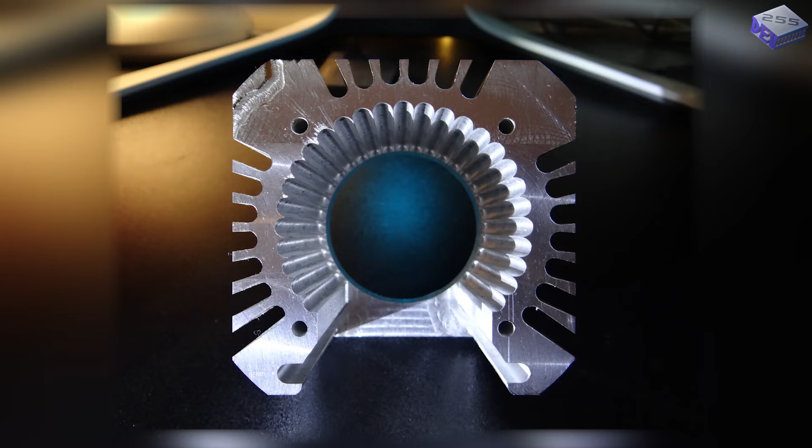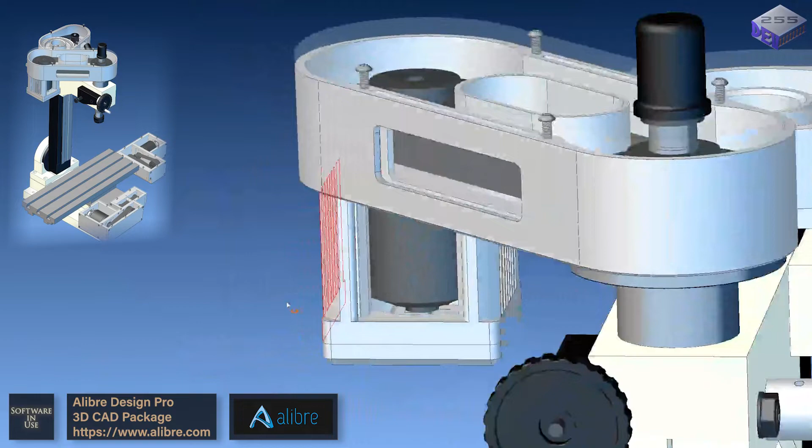This part will be fitted to my solar powered CNC mill that I'm converting and will act as a heatsink for an 1800 watt brushless DC motor. Designed in Alibre Design, this heatsink will form part of the spindle drive and mount to the spindle belt housing. It also has an acrylic window to see the brushless outrunner and provides a mount for a rotary encoder for accurate motor control too.

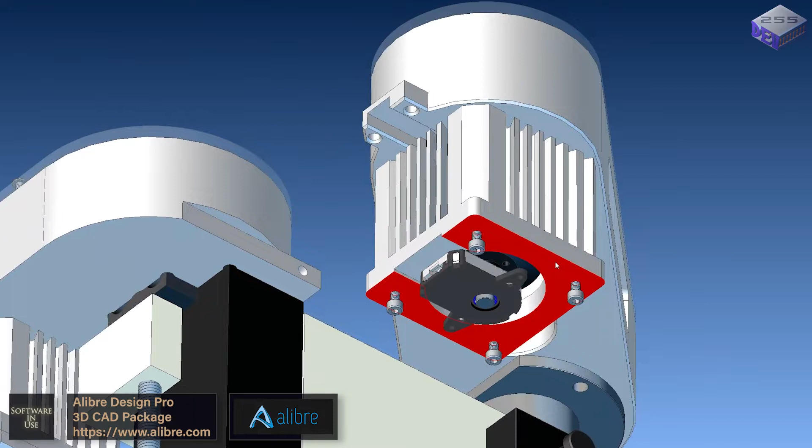This AMT 102 capacitive rotary encoder provides up to 8,192 counts per revolution and up to 7,500 RPM and should allow for precision control for machine tapping. I hope to run the new motor at around 6,000 RPM, so well within the scope of this rotary encoder.

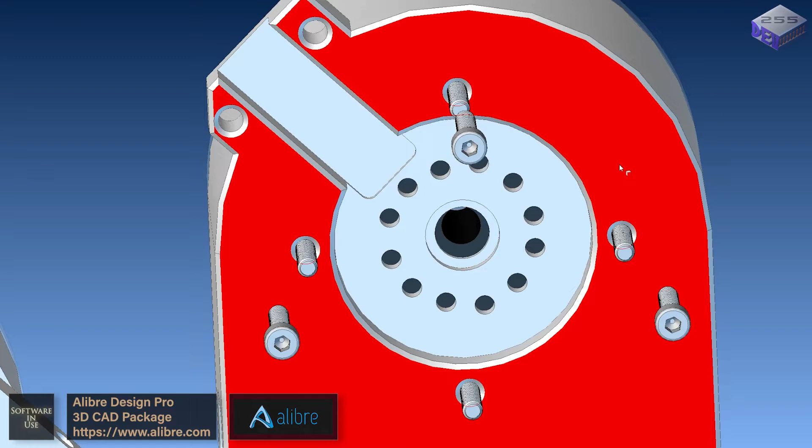The motor is not fixed at the base or heatsink, but attached to the spindle belt housing via 4 screws, which will require heatsink compound on both the motor and heatsink mounting points to use the spindle belt housing as an additional heatsink. The belt is a HTD tooth type that's lightly tensioned around 2 40 teeth timing pulleys. I chose this size as there are more teeth in contact with the pulleys and the belt will run slower with less load, so should last quite well.

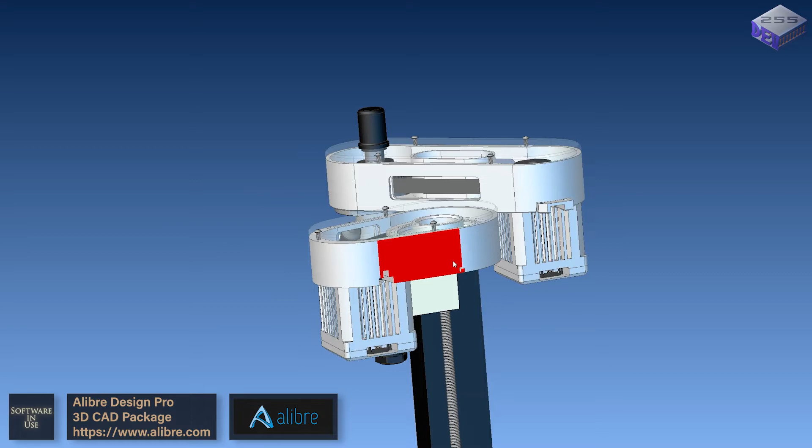There are 2 identical motor heatsinks to make, the other for the Z-axis, although this could be milled faster with the spindle speed upgrade, where the Z-axis has a belt reduction of 4:1, similar to the X and Y axes, although may need a heatsink due to lifting the weight of the spindle components.

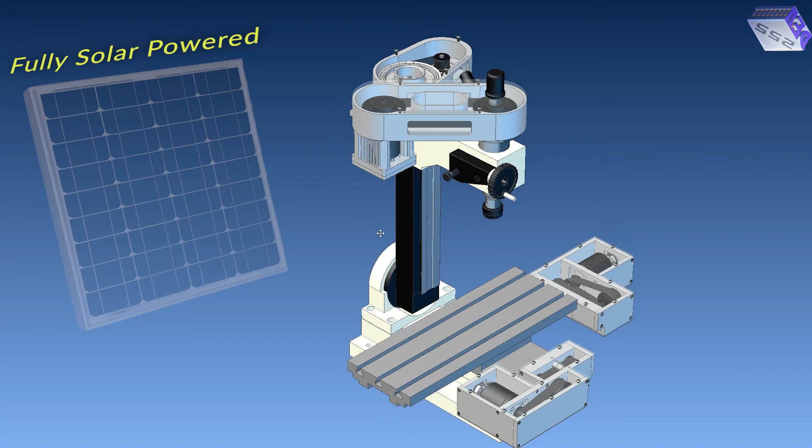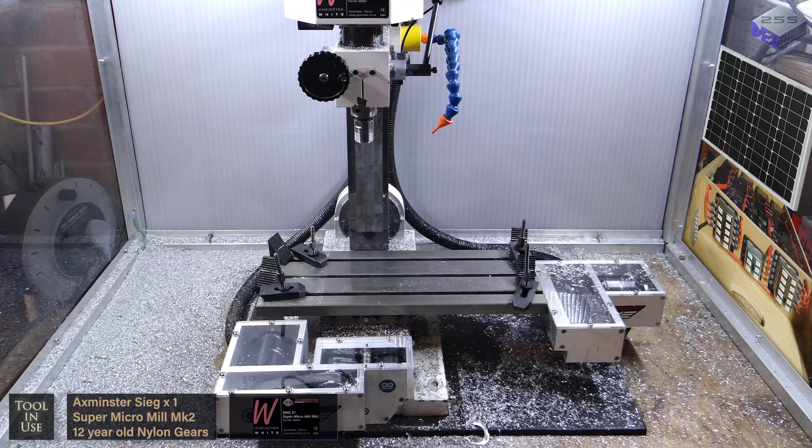As mentioned before, this mill runs purely on solar power, with a 50 watt solar panel and a set of 12 volt batteries that used to have around 75 ampere hour of capacity, although now with all the upgrades I'll need some heavier duty batteries and a larger solar panel, so I have 2 12 volt 240 ampere hour batteries ready and a 330 watt solar panel. I just need to wire it all up. The X and Y axes run on 12 volts, where the Z axis and spindle will run on 24 volts and will hopefully look something like this.

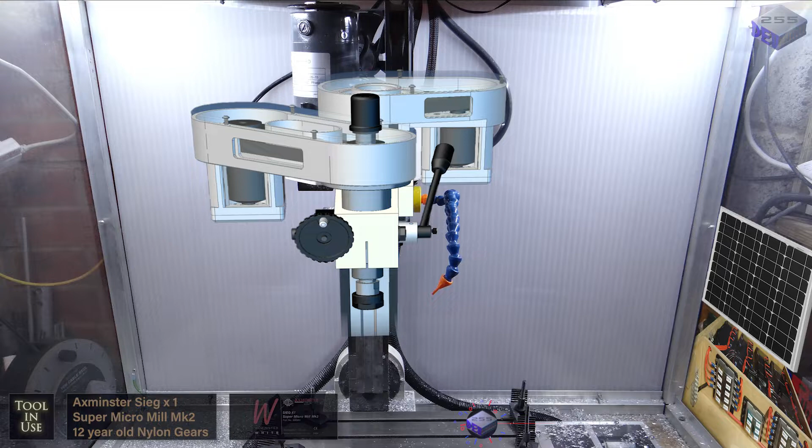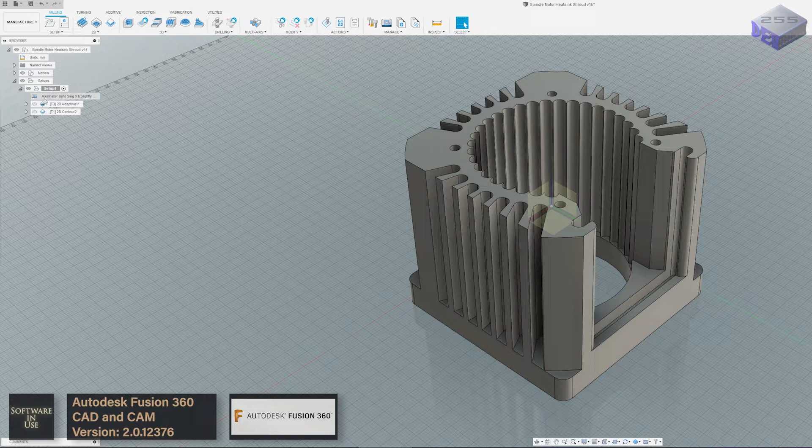So, I like to use Alibre Design for the CAD, computer aided design model, and Fusion 360 for the CAM element, being computer aided manufacturing. Essentially, creating the G-code for the mill to run. But first, the toolpaths need creating around the part, and Fusion 360 has some great tools for this, and it's easy to see the route the tool will take prior to cutting through stock.

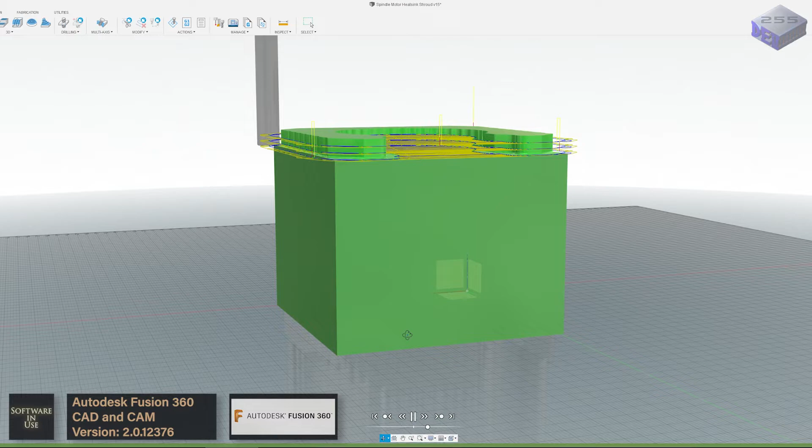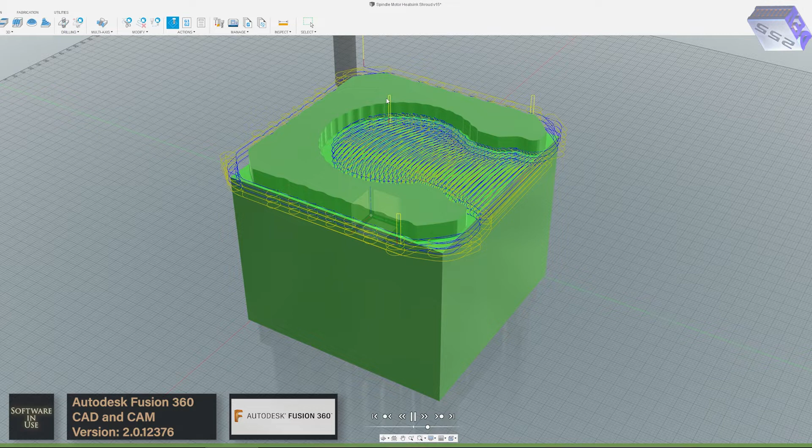The first cutter will be an 8mm end mill with a small corner radius that will remove the bulk of the material layer by layer. The only issue with my mill at the moment is the lack of CNC Z-axis, so I'll have to lift and lower the Z-axis manually for each layer. So these Z-axis movements will have to be removed manually in the G-code to keep the machine at the same height during each layer. Where there are height changes between each layer, I've programmed this into the mill to pause milling and tell me the required height so that I can manually move it, then continue the operation.

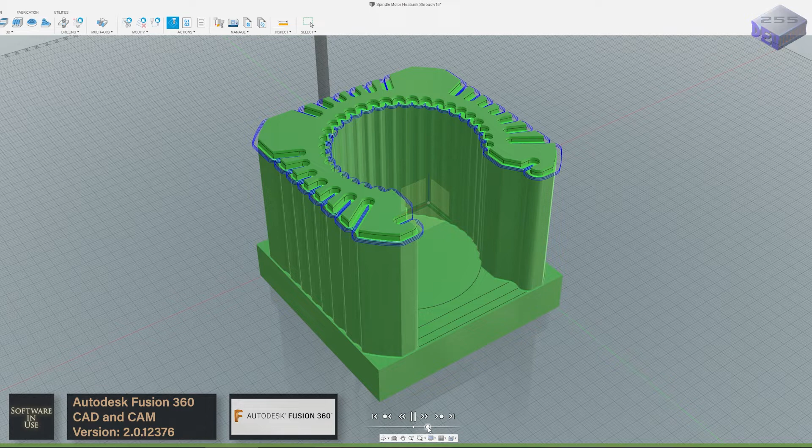And then once the bulk of the material has been removed, it's onto the 4mm long tool to cut out all the features. This will probably take some time as the cutter is long and more flexible, so I'll have to take shallower cuts at 2000 RPM, and that's the maximum speed for the current motor that's on there. It took a while to sort the toolpaths out, as I'm only just getting to grips with the Fusion 360 system, although there are plenty of tutorials online. I may even make one of my own.

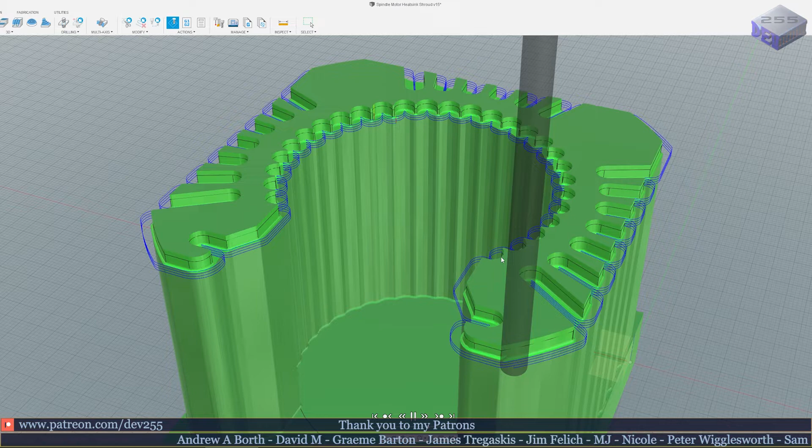So down in the depths of the toolpath, you can see the starting position and the layer drop down points that I'll have to manually move. To set up the toolpath to allow for manual Z-axis movement, I'll need to set it up to only have one layer and then restart the same G-code for each layer, rather than multiple layers. So this operation has created intermediate Z-axis movements that will need to be amended.

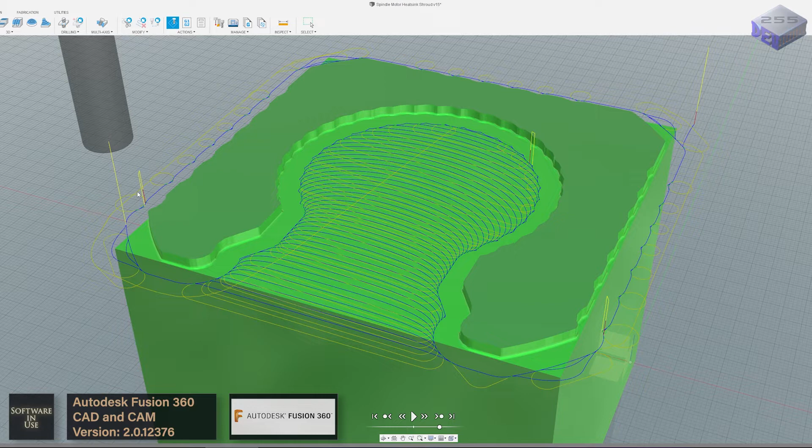So I just need to generate or post the G-code, then check the toolpaths at the points where it will raise and lower to see how it interacts with the part. Then adjust the G-code to keep the machine on the same level. That way the machine will do one layer at a time while I get on and do something else.

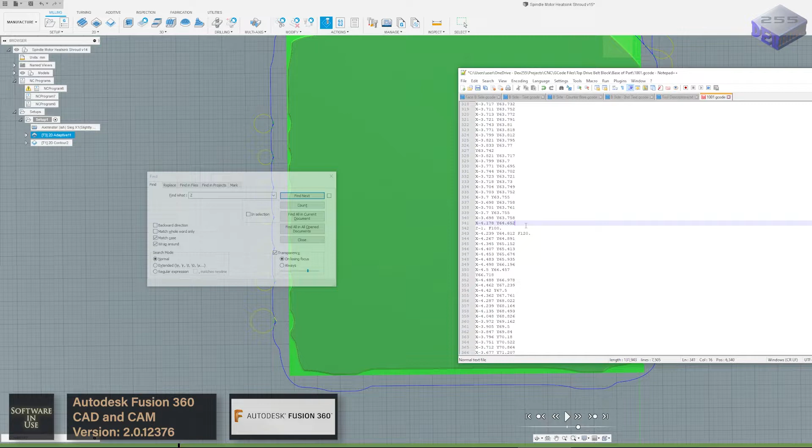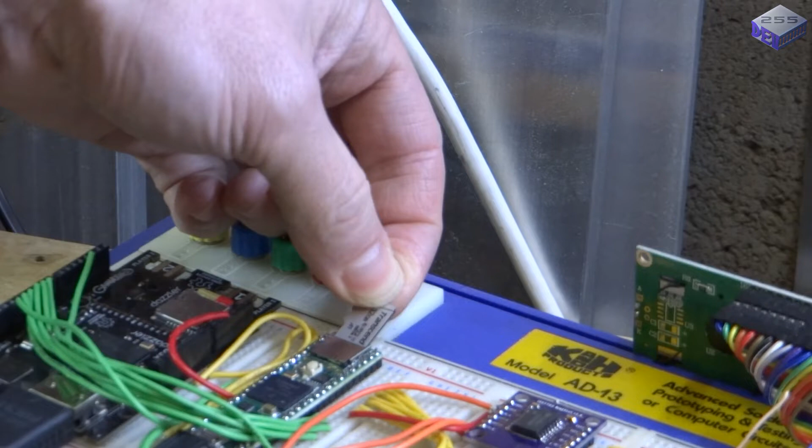Then it's a case of putting the G-code on a micro SD card and putting the file on the mill's microcontroller. In this case it's a Teensy 4.1 microprocessor running an Arduino sketch I wrote on the Arduino platform.

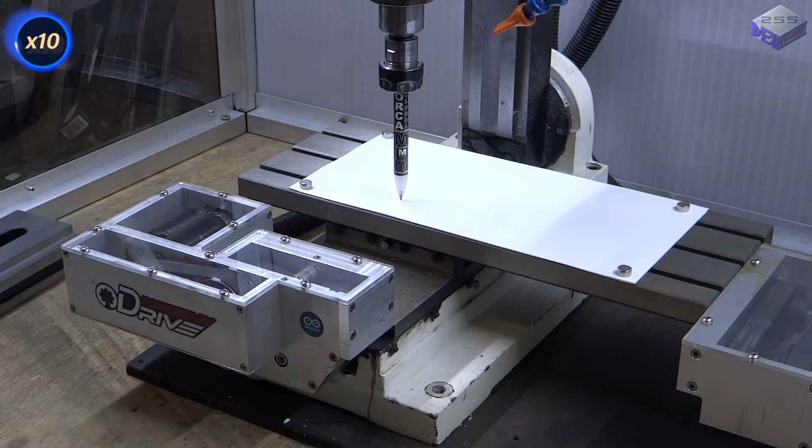I thought it best to do a test pattern first on paper just because I'm constantly developing the microprocessor code to make it easier and safer to control the machine. Plus I don't want to crash any milling bits. One of the features of the display is to show the movement of the table. To be fair, this was just me getting fancy with the Gameduino.

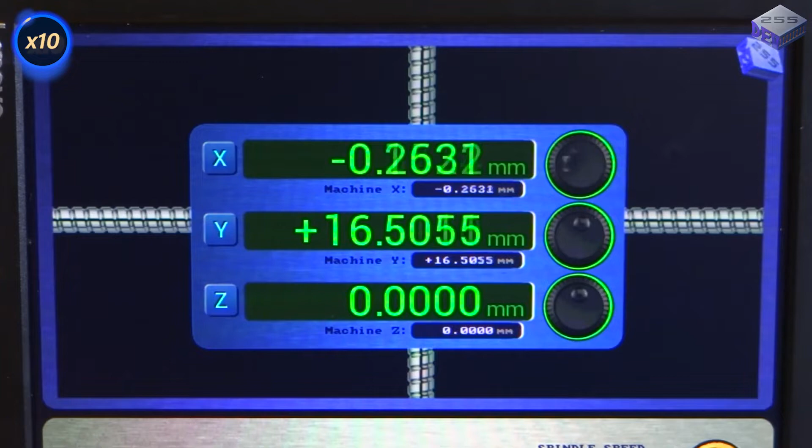This sounds a bit like Indy 500 from the Atari 2600, if you're as old as me and remember that.

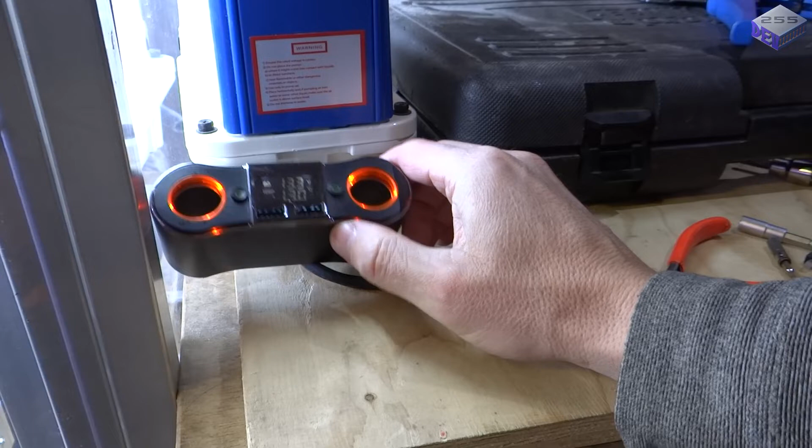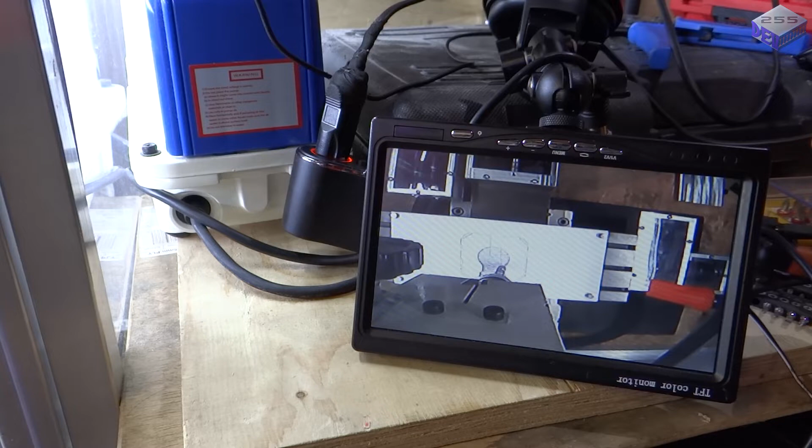Another handy device, rather than me standing around in a cold garage, is this mag mount reversing camera that I use on the MGF trailer, a 2.4 GHz transmitter and a 12V monitor. This allows me to watch the progress of the mill and just pop out to lower the Z-axis during each layer.

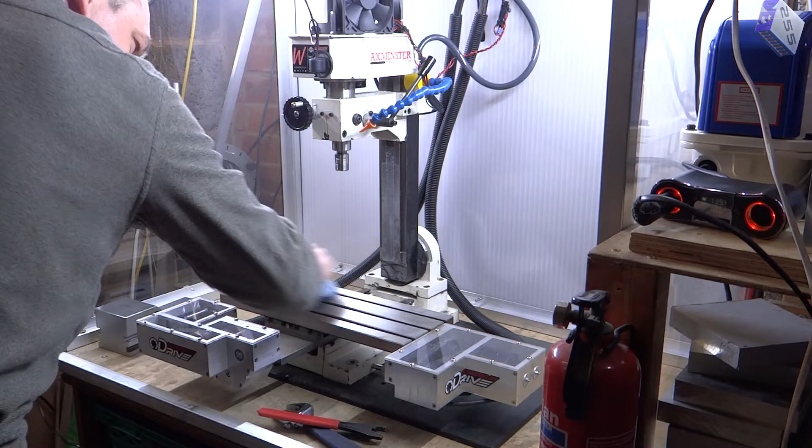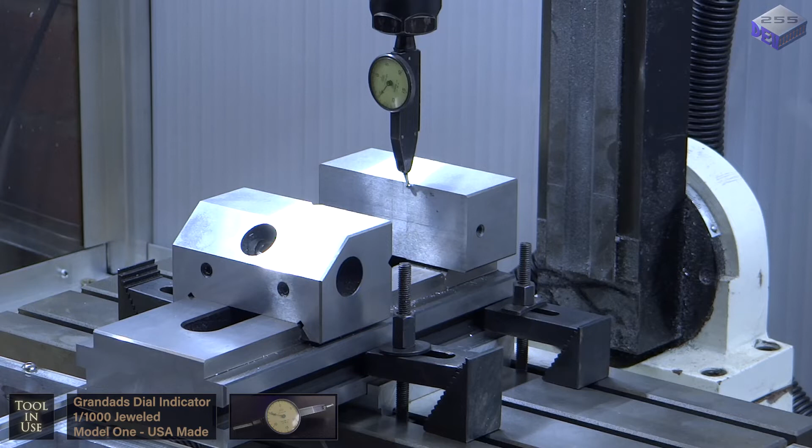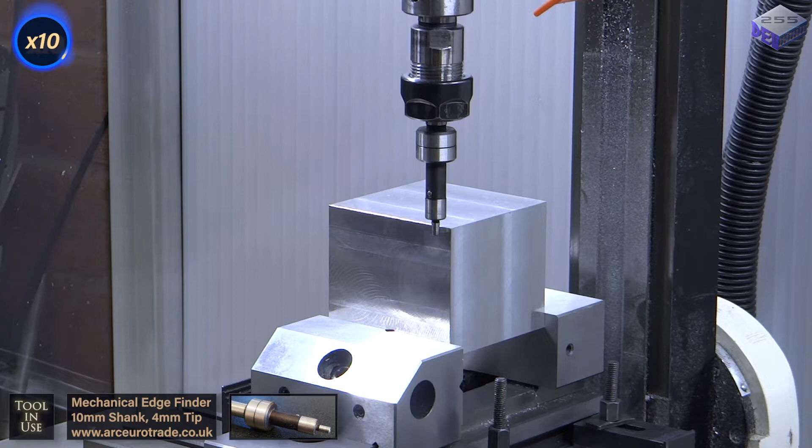Right, now to mill the part. First of all, after mounting the vise, I'll need to check that it's square to the machine. Then set the front left of the stock as the datum point using this edge finder. So it just needs the kick on the Y-axis, then the X-axis, and then cancel out the radius of the edge finder in both X and Y.

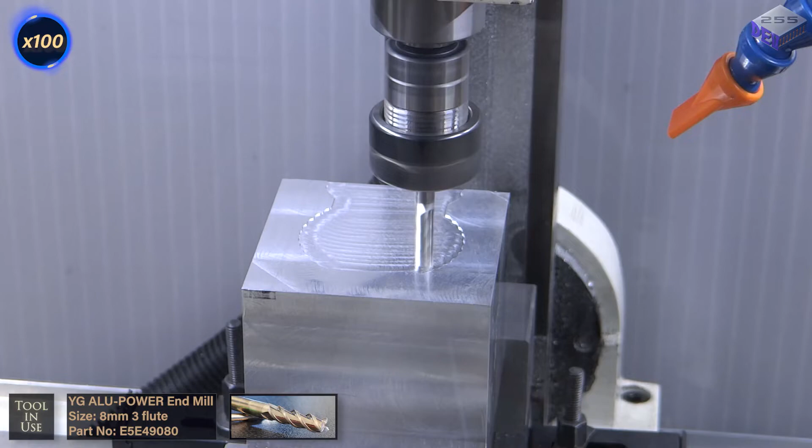I just thought I'd go over a quick test to see if everything's running okay. And then drop 1mm at a time. I know this milling cutter won't be able to do the full depth, so I've ordered a longer cutter. This is performing really well, especially with the diaphragm air blower that's keeping all those chips away too.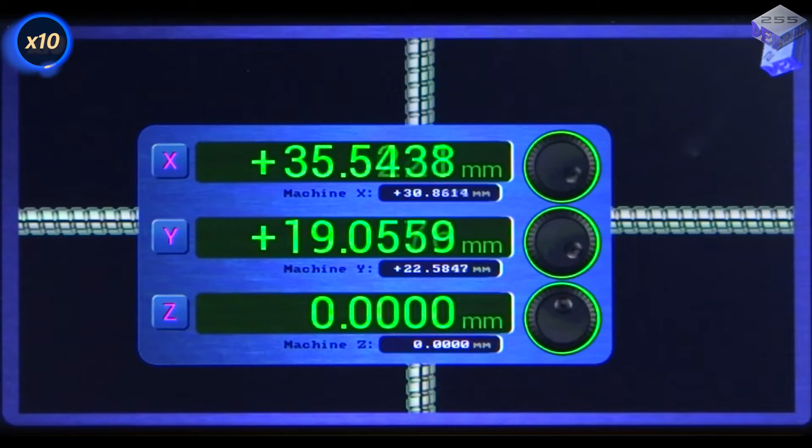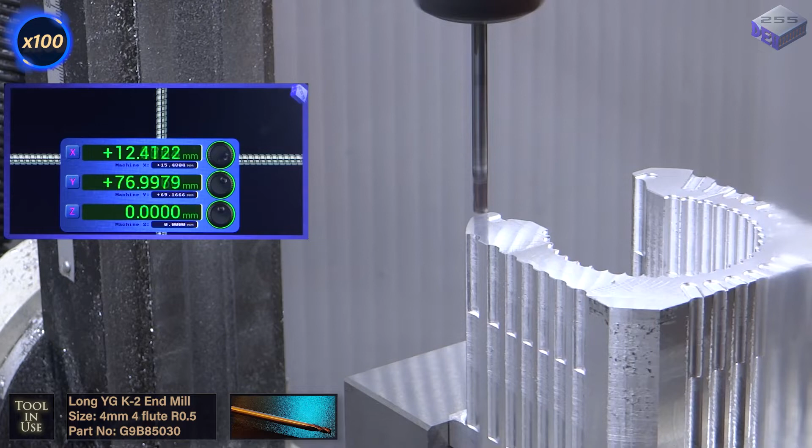I was thinking of putting a datum point on this display just so I can see where it is in relation to that. That's something I'll have to set up later though. Then it's over to the 4mm cutter again to machine out the external heatsink fins and internal features. These internal features are designed to create turbulent air to remove more of the heat. We shall see. And also I made the gaps between the fins to be 4.2mm, so there's good clearance for the 4mm bit, especially being that long.

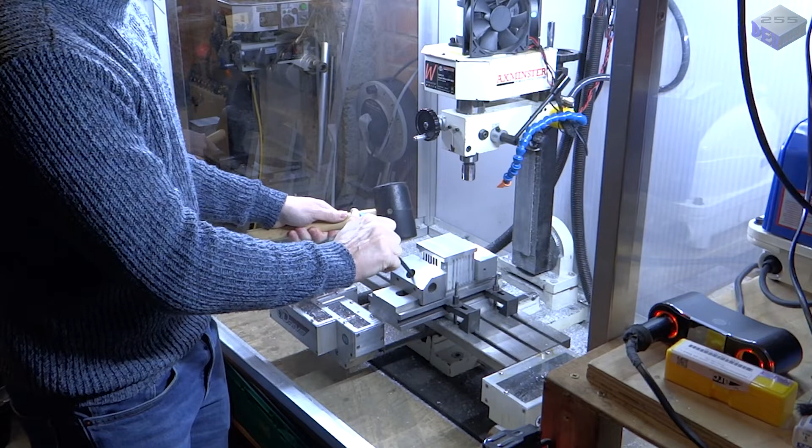And that's the main feature finished, alongside another blank ready for the Z-axis. Just the underside to do now. You can see a slight step on the side of the hole at the back there. This is due to the backlash being slightly off. I've since updated the code to easily measure and set up backlash for X and Y axis, so this won't be an issue in the future.

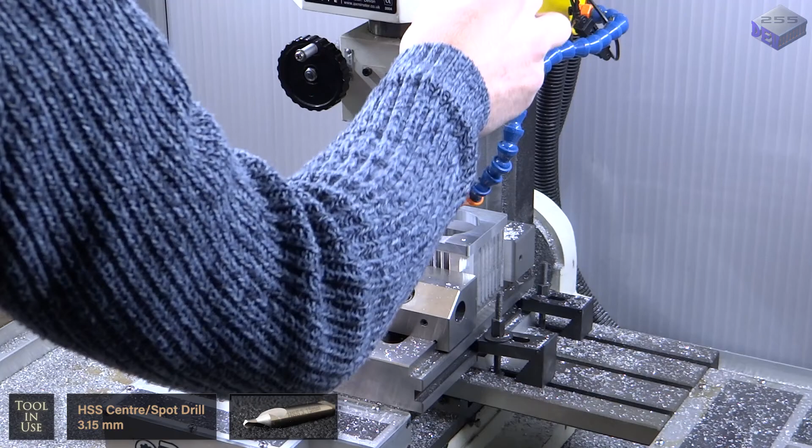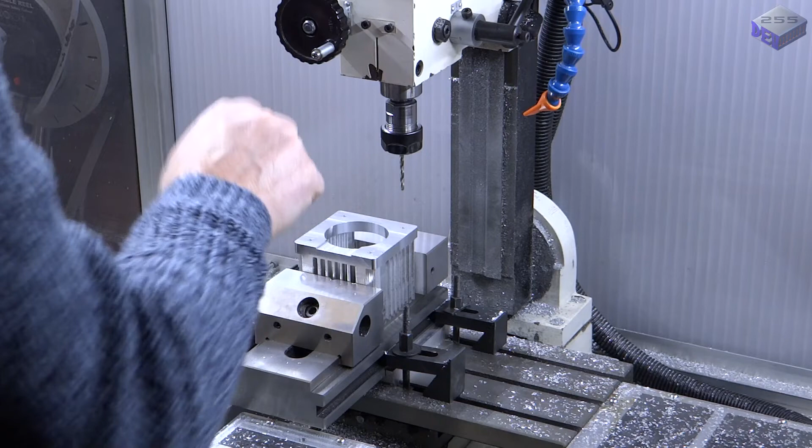So now it's just a case of drilling and tapping the mounting holes, although I'll tap the holes off the machine, as I'm not quite there with machine tapping yet. I think this has turned out quite well apart from the damage from snapping a cutter. Still, it won't affect anything, luckily.